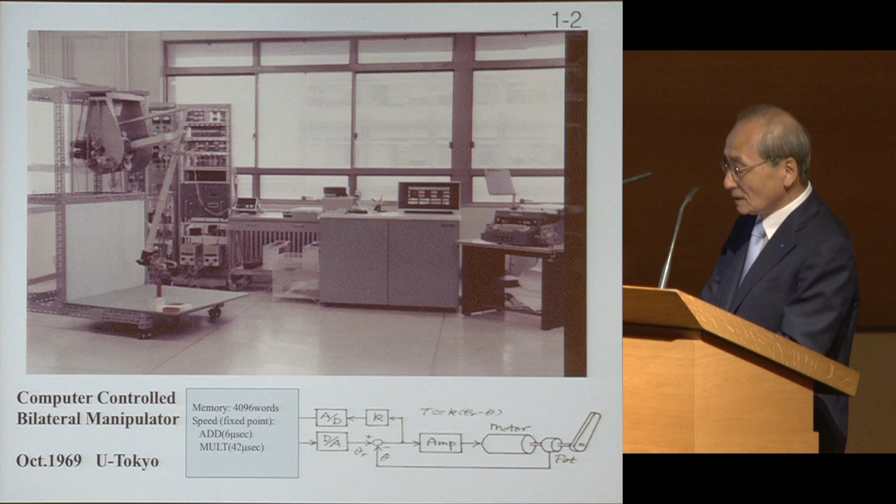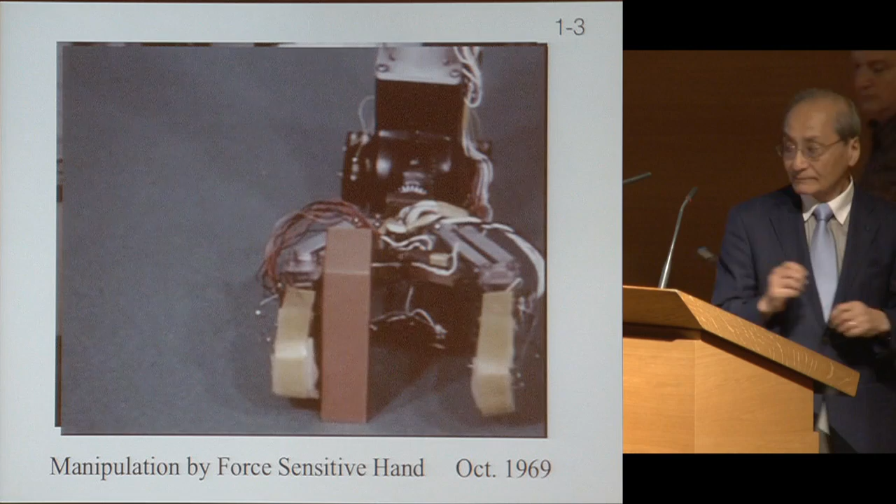So this is an experiment of the task which I did in 1969. The computer is interfaced with the manipulator, and this hand stops when it senses the touch. Okay, thank you. And using the tactile feedback, this robot can search and grasp correctly.

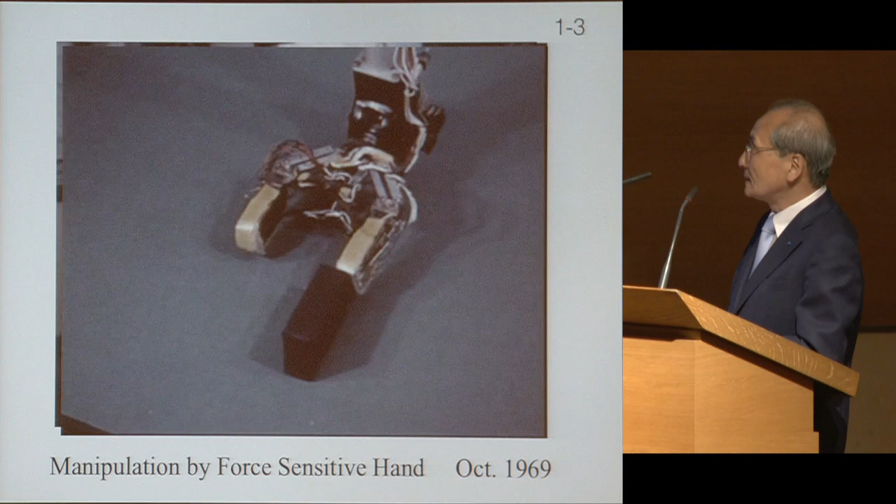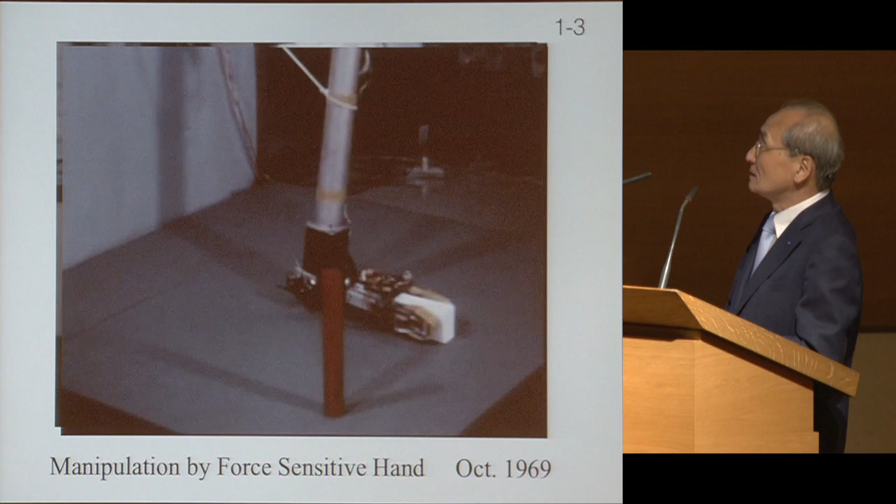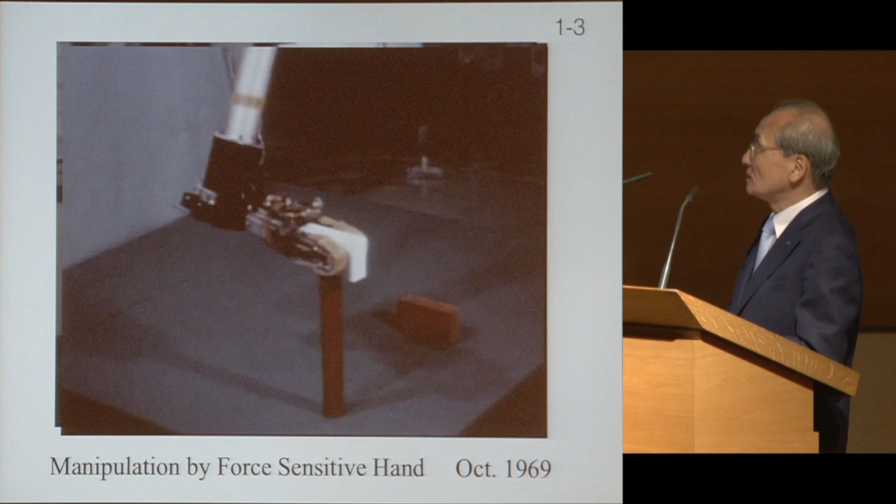And when I pull the block, it has no sense, but the robot feels the reaction force, and it releases after landing. This is also the same application to stacking the object. The robot mechanical hand must release the object after checking whether it completely touched down or not. In such a way, very good stacking can be completed.

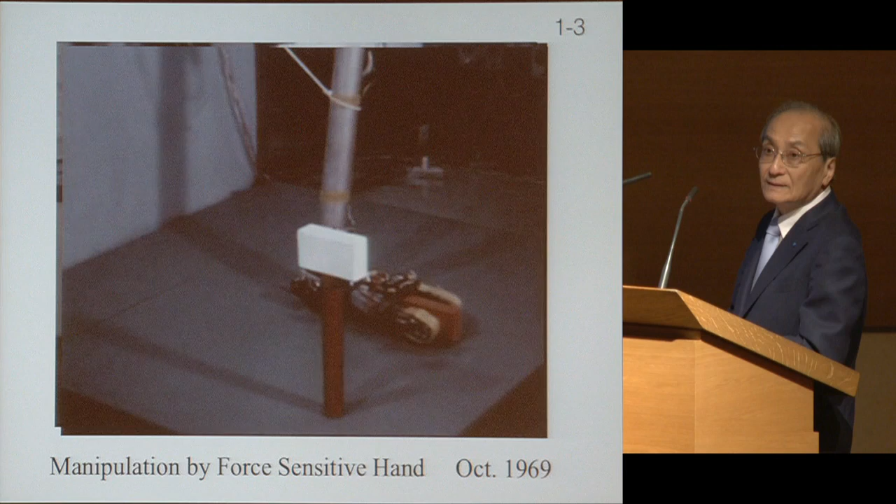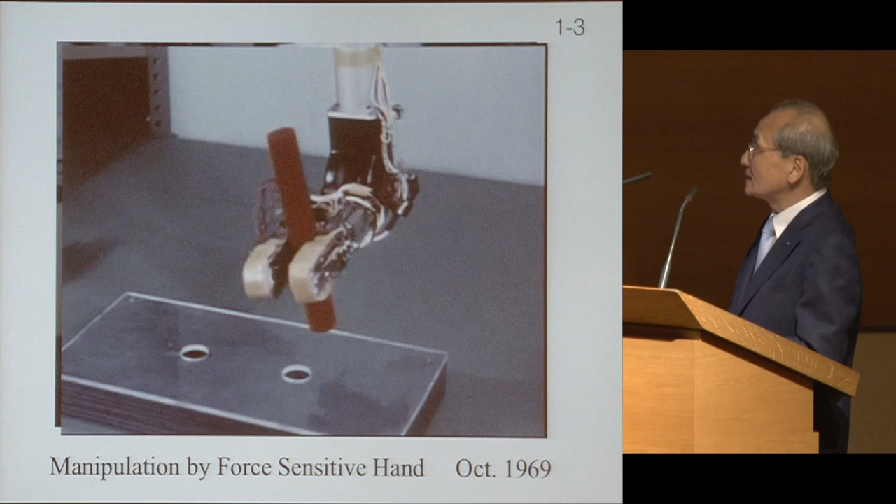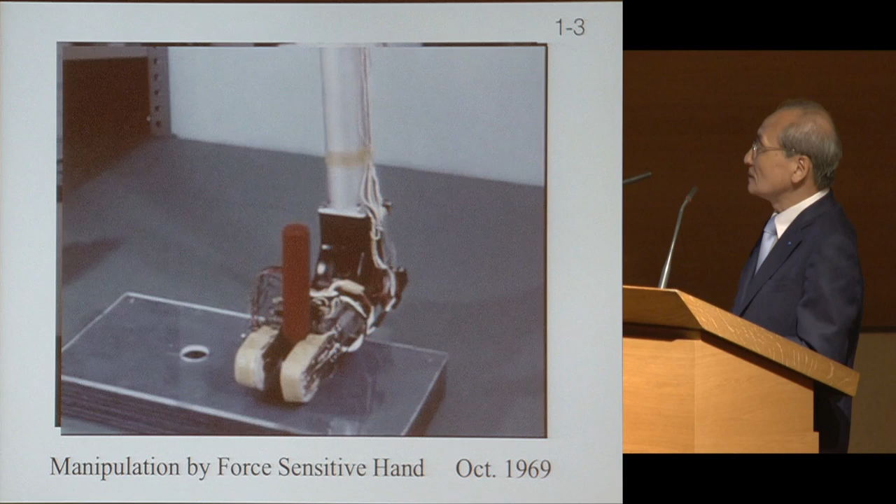At that time, the sensors were quite limited: about 18 tactile sensors and 6 degrees of freedom force sensors. So I think this is a prototype of the assembly tasks for robots. It searches and grasps the pin and pulls it out, makes sure it is completely pulled out, and then tries to search for another hole by sliding and feeling the reaction force, and it changes the shape and pushes in. So this is the very first experiment to make the assembly tasks.

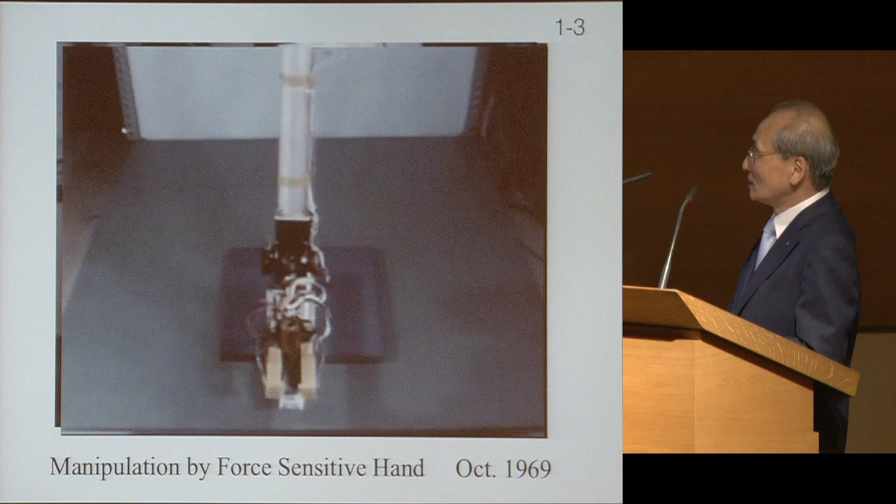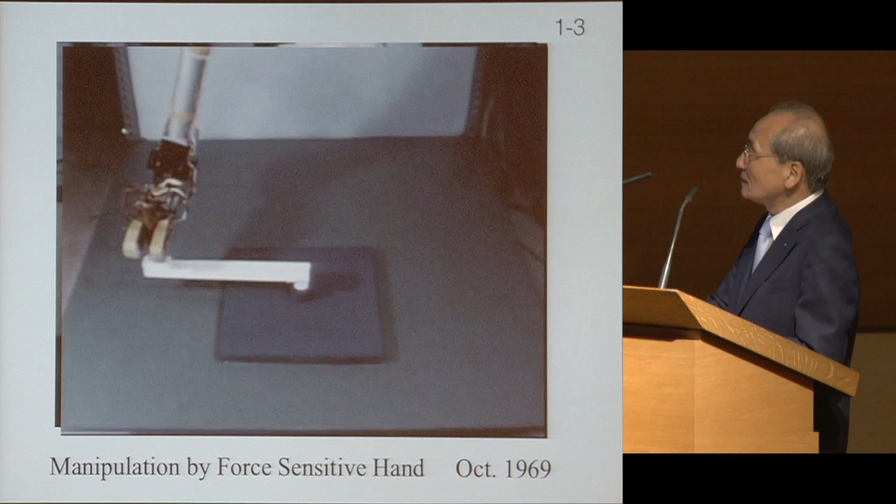This turning crank is a very difficult task because the locus trajectory of the crank is defined by the machine itself. The robot must follow along the constraint, so it needs force feedback. This is a key point of my PhD work.

Yesterday, Jean-Paul talked about 50 years of robotics, about industrial robots 50 years ago and today. But I think intelligent robotics started from the 1956 Dartmouth conference. At that conference, McCarthy, Minsky, and others defined artificial intelligence, so I think it is the birth of artificial intelligence. And in 1961, at MIT Lincoln Laboratory, Roberts did the TV camera interface to a computer, and he made the first computer vision.

In 1962, Ernst made a computer-controlled hand. This is the first computer-controlled mechanical hand. And also, as Jean-Paul said, Engelberger introduced Unimate in GM works, so maybe 50 years of robotics is counting from that. In the late 1960s and around 1970, that is the age of the hand-eye system. MIT AI Laboratory, Stanford, SRI International, Edinburgh University in the UK, and Electrotechnical Laboratory and Hitachi in Japan, 6 groups competed to develop hand-eye systems.

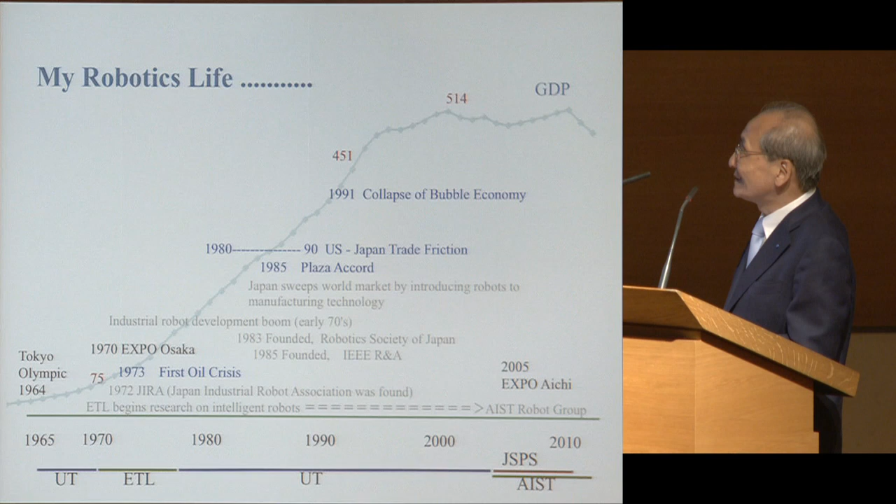And this is a curve of Japanese economic growth. When I graduated, the GNP was 75 or something like that, and right now about 500. So during these 20 or 30 years, it became about 6 times. After that, almost flat, and now decreasing. So society changed very much. The robotics research and actual application to industry is along this curve. The very rapid growth of the Japanese economy almost corresponds to the development of industrial robots and so on.

So I am going to part 2. Robotics is the study of the intelligent connection of perception to action. This definition was made by Sir Michael Brady when he started the first ISRR, in 1983, more than 25 years ago. I like this very much. Yesterday he said intelligent connection of sensing to action, but I think it is also action to perception and so on.

Along this idea, my study in the university environment was done with 4 pillars. One is manipulation, second is robot vision and hand-eye systems, third is vision-guided mobility, and fourth is system integration and intelligence. I think the most interesting thing in robotics for me is to make the science of integration, to combine perception, action, intelligence, user interface; everything must be integrated into a single system.

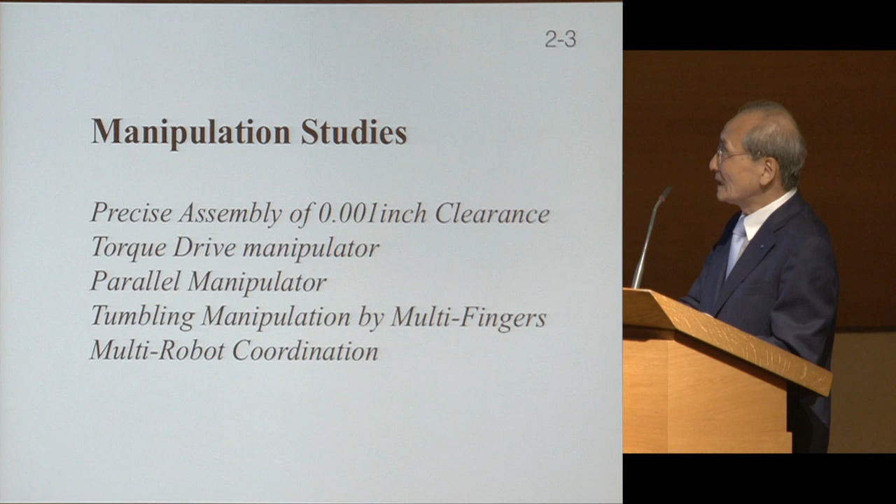For that purpose, I have tried many challenges with my students. In the university environment, not myself, but as Mike said yesterday, they are the creativity drivers, the creativity engine. And it is very, very happy for me to have very good students. In manipulation studies, I did many kinds of things, for instance, precise assembly with 1/1000 inch clearance, torque drive manipulators, parallel manipulators, and so on.

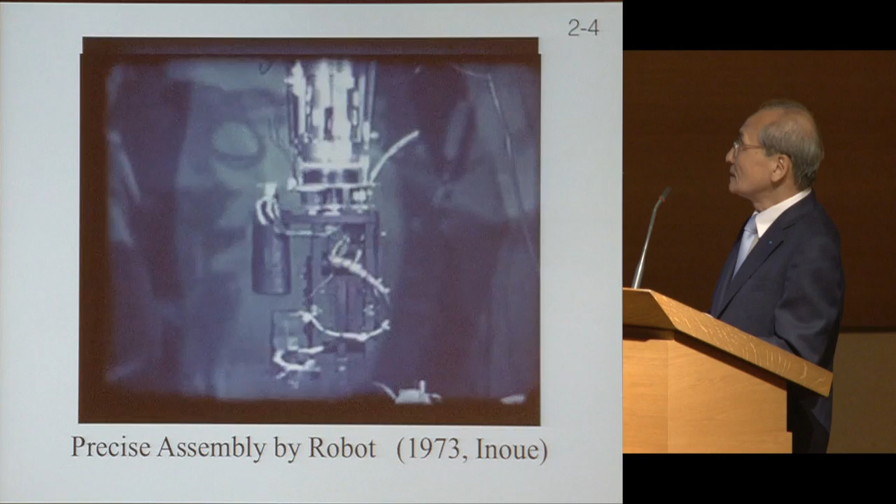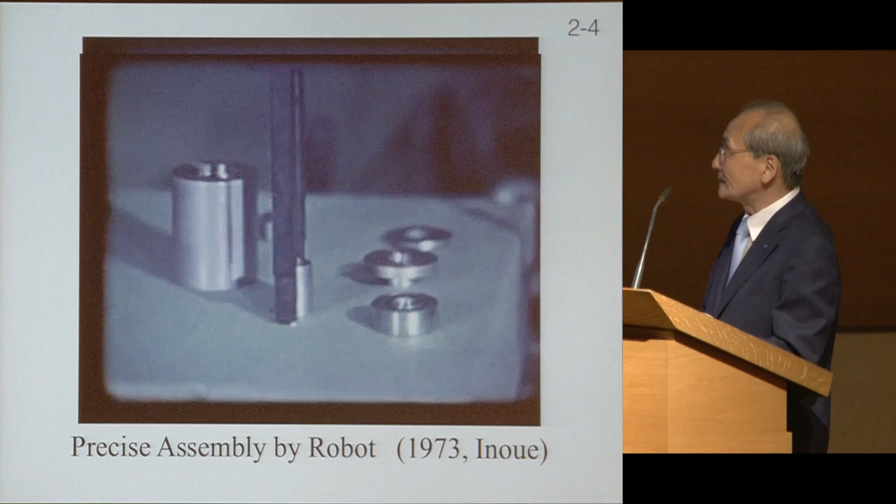I will show some examples from when I was staying at MIT in 1973. That is a very simple assembly task with very close clearance. This is the robot system interfaced to a PDP-6 computer that is connected to a PDP-10. That was a very good research environment for me. The method to do the assembly task is almost similar to my PhD work, but this is much more precise. And I enjoyed the stay at MIT very much.

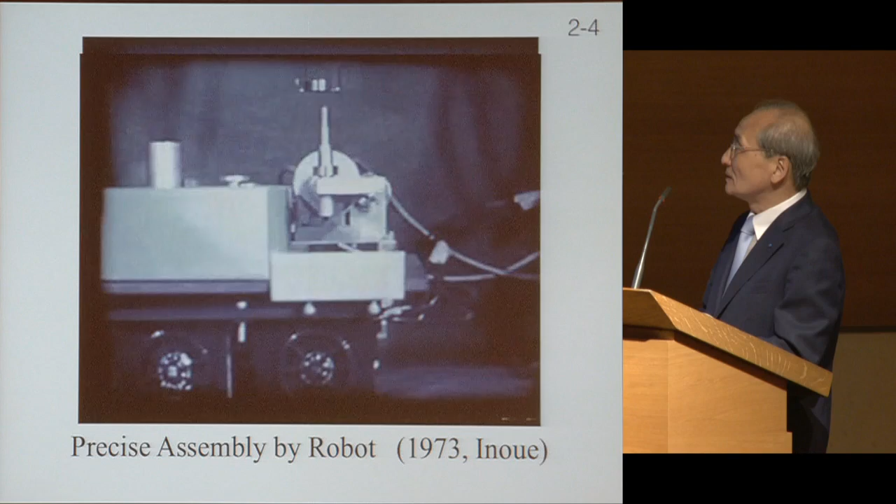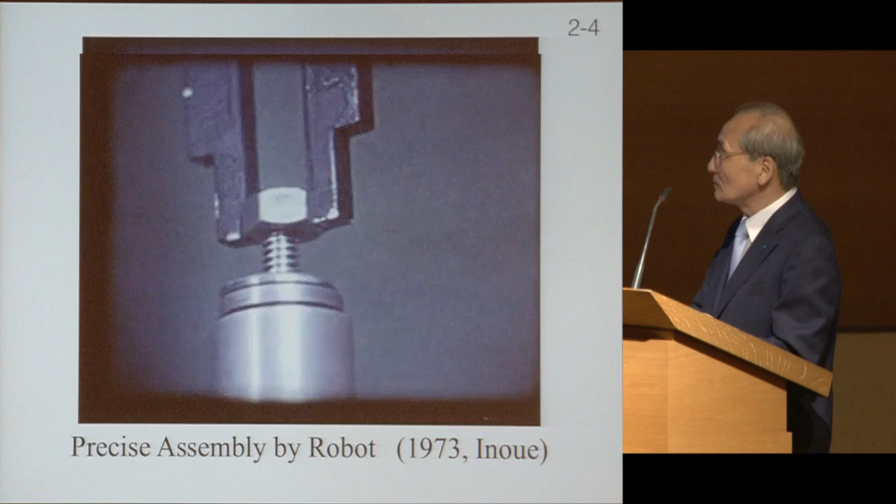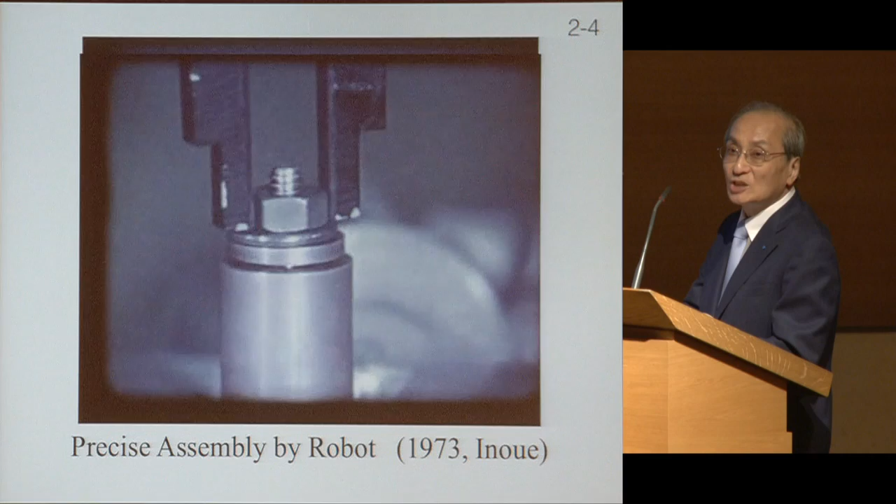When I returned to Japan and moved to the university, I decided every program must be written in my laboratory. In such a way, this is a very precise assembly task. One of the reasons is that Professor Minsky at that time made a mini robot proposal to DARPA that declared thousandth-of-an-inch assembly by robot, but nobody did it. So I tried. I had a good chance to do it.

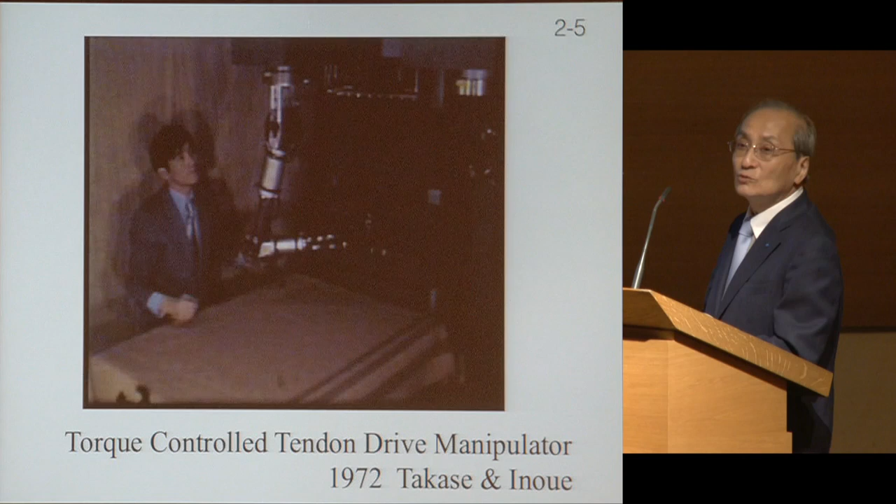Okay, so far, most of the compliance and force feedback is done by torque sensing and force sensing. But another new challenge is to create a completely new machine in which all of the joints are torque-controlled, not position-based. This is an example like that, and the smooth operation of the system.

So I have to hurry a little bit.

This is another interesting operation. Without grasping the object, we can change the posture of the object: tumbling, sliding, turning, in such a way. This is a very efficient motion, not only for manipulating very small objects but large objects like furniture. In that case, part of the gravity is supported by the ground, and just a small force is needed to change the posture.

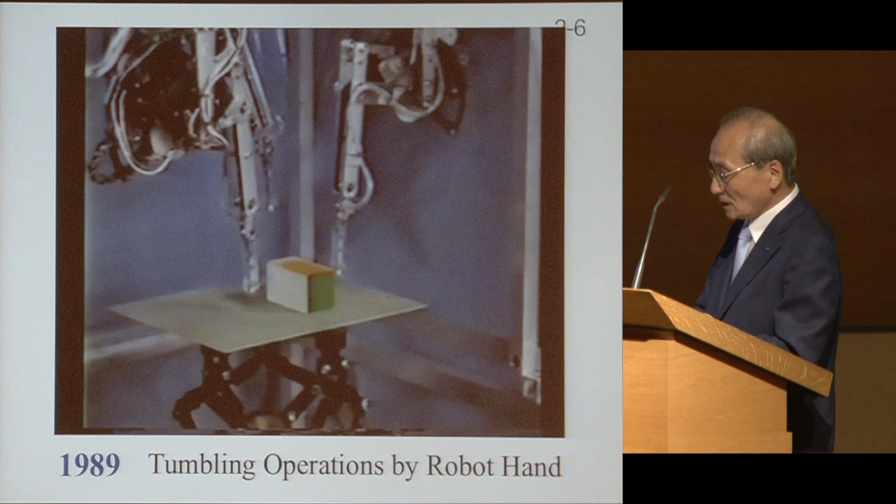So, the second pillar is robot vision and hand-eye systems. The emergence of the hand-eye system is around 1970. But when I moved from the Electrotechnical Laboratory to the university in 1978, I started to build a very small laboratory. All the walls must be painted, like Mike said, and this is a very simple hand-eye system: the vision system, a manipulator, and a computer system, and all my students were engaged in their study using this system. Somebody concentrated his effort on the vision system, others on manipulation, and others on intelligence, planning and so on.

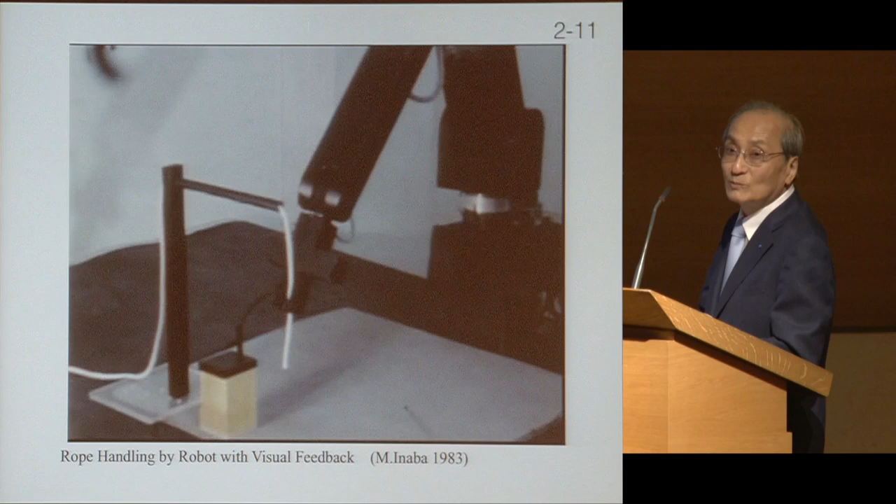So using those activities, we prepared a system, Cosmos, a platform to accumulate cognitive sensor-motor operation studies. Every year, every month, every week, the activities of my laboratory were concentrated and integrated into this system. And the first experiment is tying a knot. Professor Inaba, at that time a student of mine, tried to make the stereo vision system, to recognize the position of the rope, find the hole, and turn a crank. At that time we did not have much money, so a mirror assembly made the stereo vision system.

Right now, everybody carries digital cameras, and the performance is getting very good, and taking the picture and processing, retrieving, and changing the image is very easily done. But 30 years ago, it was very difficult to get computer vision systems. Before doing the hand-eye system, at first we had to build our own vision systems. So I also tried to develop some vision systems, the stereo vision system, shape recognition, depth and so on. In such a way, every vision system must be connected to the manipulation studies. I think computer vision pursues the precise recognition and representation of the object. But for robot vision, it is very important to make the feedback in real time. Therefore, some local high-speed vision is needed, also in 3D. So we developed many kinds of vision systems.

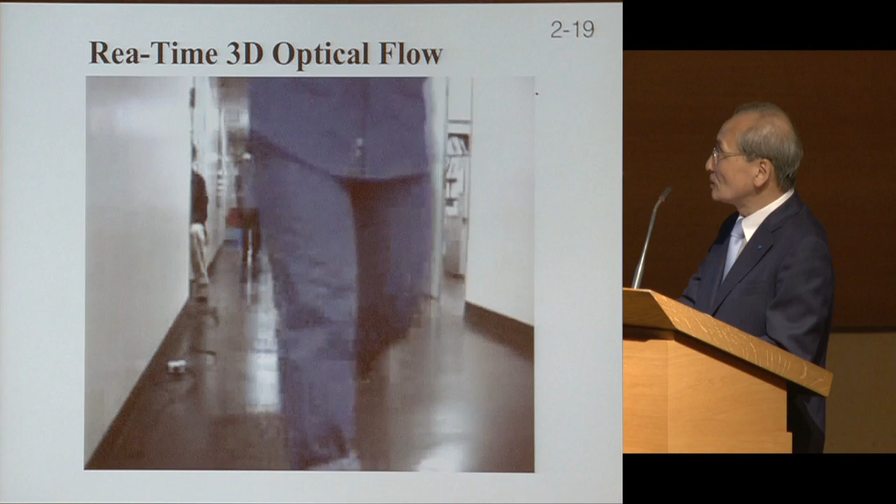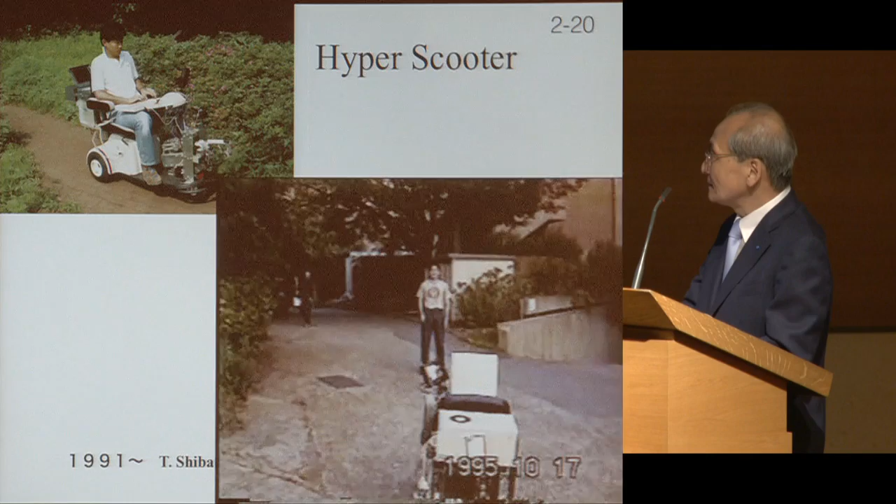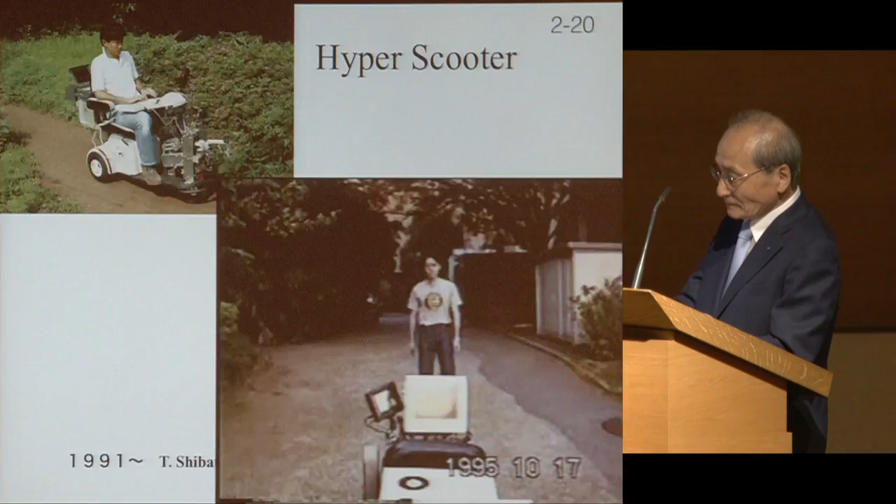So the third is the vision-guided study. We have developed many vision-guided robot systems. This is a stereo tracking vision system put on a mobile robot, detecting moving people and recognizing objects. And this is also the scooter system, in which computers, the steering system and the stereo vision system are put on a senior citizen's wheelchair. This guy built this system and did the experiment here. That was about 15 years ago, and a car was coming, so he was forced to stop. Maybe the driver was surprised. And this is also another kind of mobility.

The technique which is used for controlling locomotion, that is also the vision-guided motions. I have to skip. The fourth pillar is the system integration and intelligence. So the mobile robot with vision, manipulation, and AI, and teach a robot how to handle objects by showing task demonstration, and also remote brain approach for software R&D.

So I will talk a little bit. This is my first build of the totally integrated robot system, mobility and manipulators and the TV cameras here. This is a fiber scope here, and this is the lens. Look down here, and this is a tactile sensor over there, and the manipulators, the vision systems, and mobility, tactile sensors, and this is connected to the large computers for making the intelligent system. So using this, we have tried many demonstrations.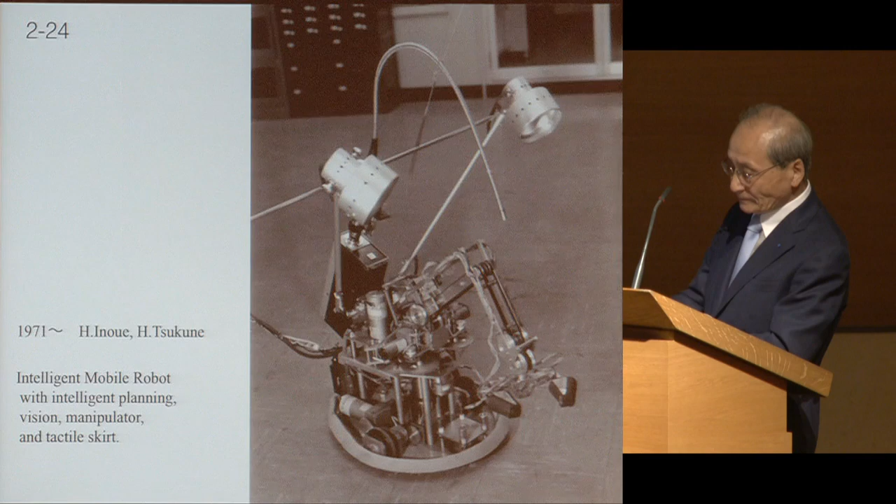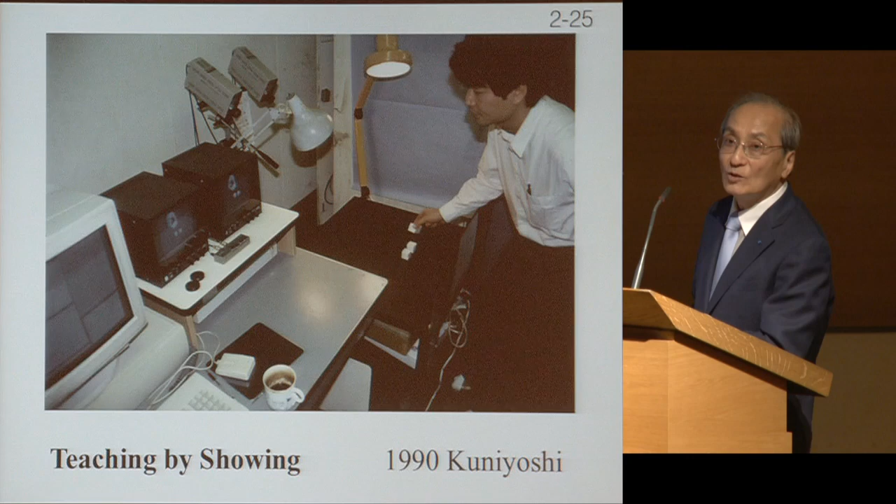This is Professor Kuniyoshi now. He is showing his assembly task in front of the vision system. And this vision system recognizes what kind of assembly task he is doing, and recognizes, making a plan and turning it into the real program. That means let's show some operation in front of the robot vision, then teach what should be done.

This is a very interesting approach, which is done by Professor Inaba. He is a successor of my laboratory. When he was the young professor, he proposed this remote brain approach. That is about 20 years ago. The robot consists of brain and body. Body is a machine to be controlled. Brain is a computer. Usual design. In usual design, computers are put inside the machine, but by the limitation of the size and the weight and so on, the computer performance is quite limited.

Dr. Inaba does not like this kind of limitations. So he considered to link this robot with the computer by wireless. This is just only the wireless servo systems, and the computers and wireless servo system are linked by wireless, and the vision system is also linked by wireless. So using this, the brain is placed in a remote place. So he said, remote brain approach for intelligent robot.

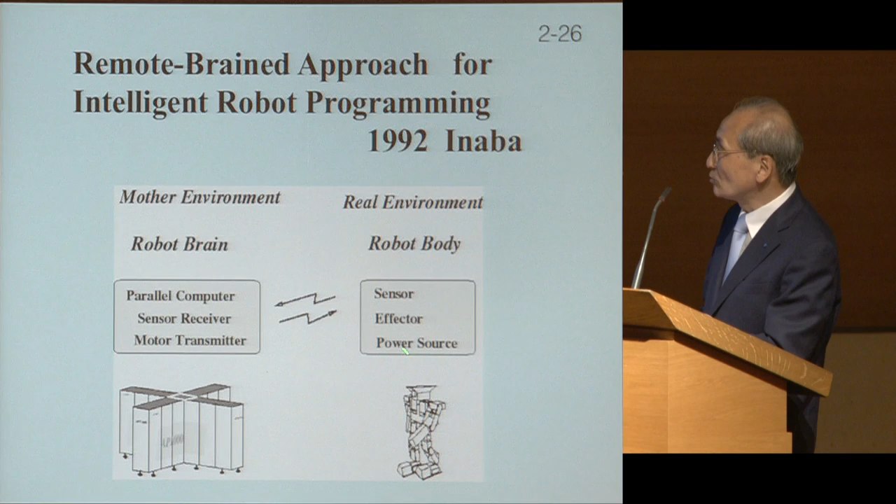This is quite a good approach for the study of intelligent robotics, because the size of the program is not limited to the computers on board. So supercomputers are used to make the recognition, the intelligence, and the database, and then the result is transferred to this. Using this, many kinds of robot were done.

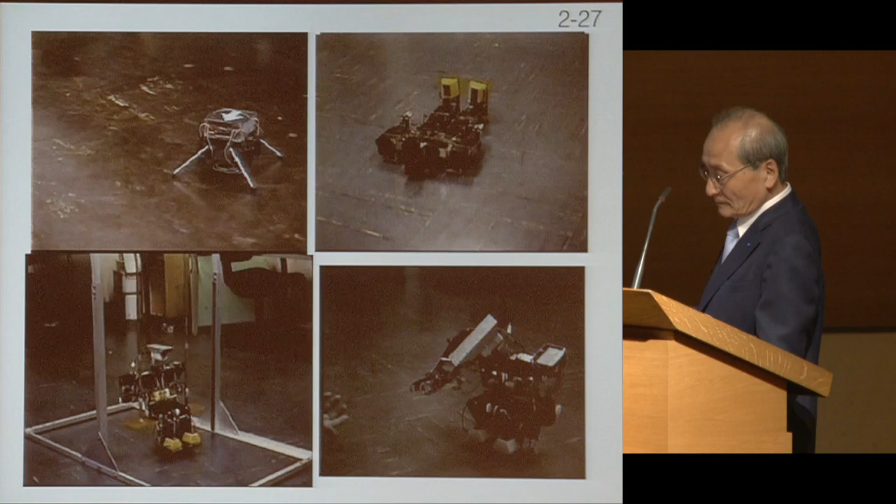This is a 4 degrees of freedom very small robot system. And this is for the servo system, wireless servo system. There is no computer here, but it is maybe the first, just only one robot that can turn and has no problem to turn over. It can change and turn. Another approach. Oh, sorry.

This is this robot, the human-shaped robot, very small one. It is not afraid to fall down. Even if it falls down, it can stand up. Therefore, it is very good to do experiments like this. When I show this movie to some small children, they ask, does this robot feel cold? But this is just a noise.

And also this is the vision-guided motion control, the swinging operation, to get the timing to accelerate the motion. The vision system is here, and looks over something. And according to the motion of some target, this robot can identify at what time they can move it.

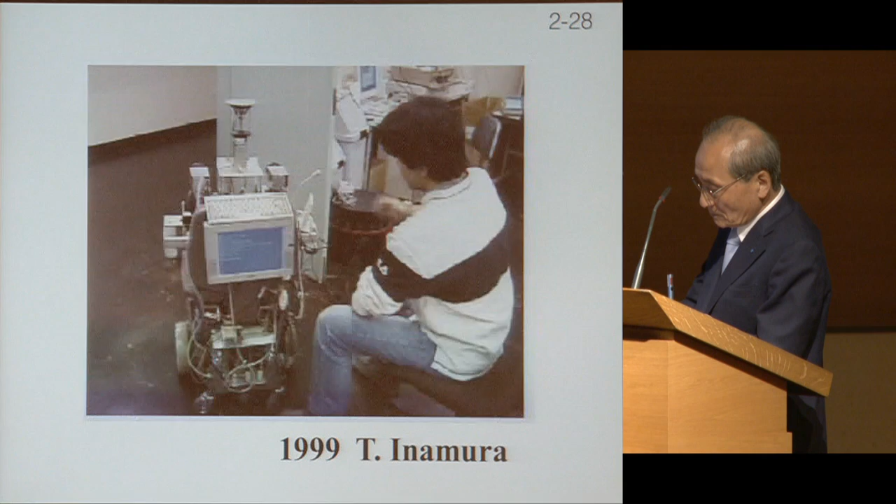Okay, I have to move to part 3. The part 3 is about humanoid. The last 5 years of my university work is devoted to developing humanoids. The reason, reason one, humanoid is an ultimate target to integrate all aspects of robotic functions: perception, manipulation, mobility, intelligence of all kinds, communication with humans, and energy and structure. All of them must be embedded within the limited size, weight, and shape.

To create anything which we need is the policy of JSK. JSK is my laboratory. We have developed and accumulated all the necessary technology by ourselves. All the technology was transparent. Therefore, we can change everything to integrate as we want. And the last 5 years, I think it was a time to integrate them to build a humanoid. Because without this opportunity, I have no chance to build a humanoid in my research life.

Therefore, the last 5 years were devoted to humanoid, and this is also a little bit older, one of my sons. And this is a dynamic humanoid. Year by year, we developed many kinds of things, H6 and H7 and so on. All the machines are designed by our students, and every program, vision, control, everything is done by them. One of the motivations why I started the humanoid is that at almost that time, Honda announced its humanoid systems. When my students saw Honda's P2, the shocking humanoid studies, my students wanted to build a humanoid by themselves.

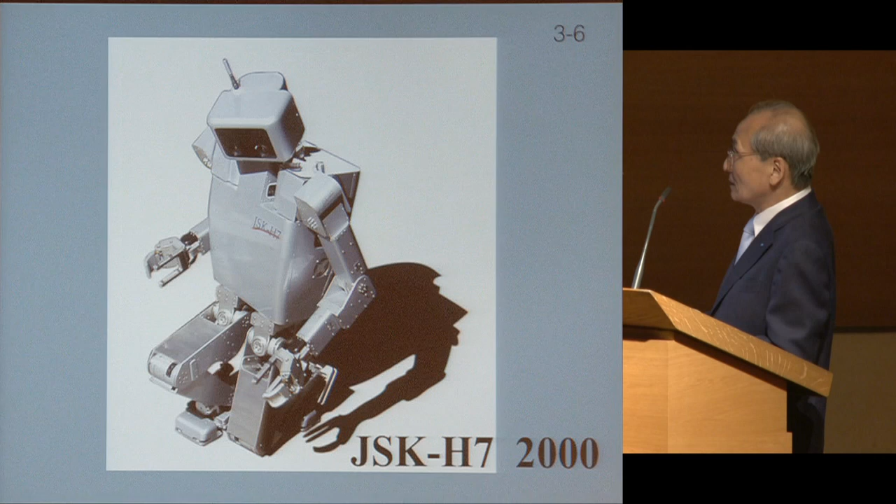So they asked me to have a plan to build a humanoid. I decided to do it because most of the components, the control system, vision system, intelligence, communication, everything was done by the remote brain approach beforehand. So the only difference is not the remote brain system, but real embedded computer systems. So it is not so difficult to develop. Honestly, it took about 1 year to complete it.

This is 2001. Marc Raibert visited my laboratory. He had no appointment. He called me one day: I am now in Tokyo, I heard you built a humanoid robot, so can you show me? Then he came, and he tried the joystick control. I think he's a very good driver. By moving the joystick, he can move the humanoid, very dynamic work like this.

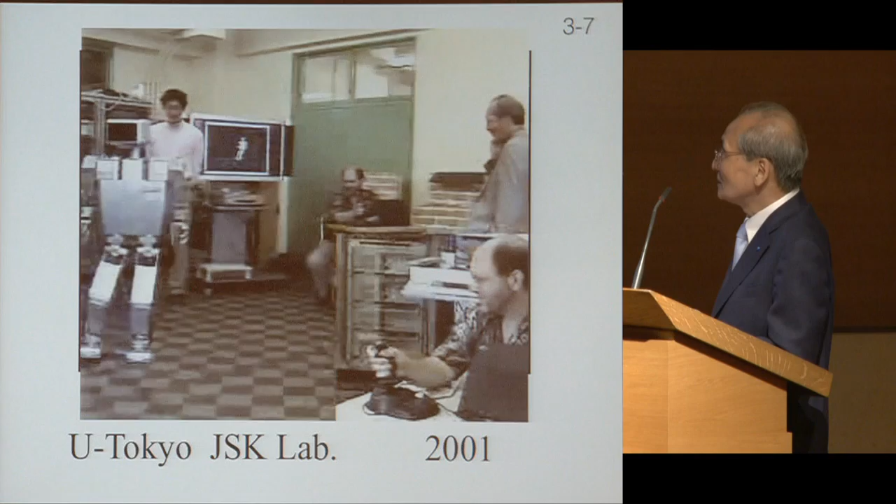Oh, changing a little bit. So this is the guy who developed it, Kagami-kun and Nishiwaki-kun. They did not control the robot like this because they were sometimes afraid it would fall down, but Mark didn't.

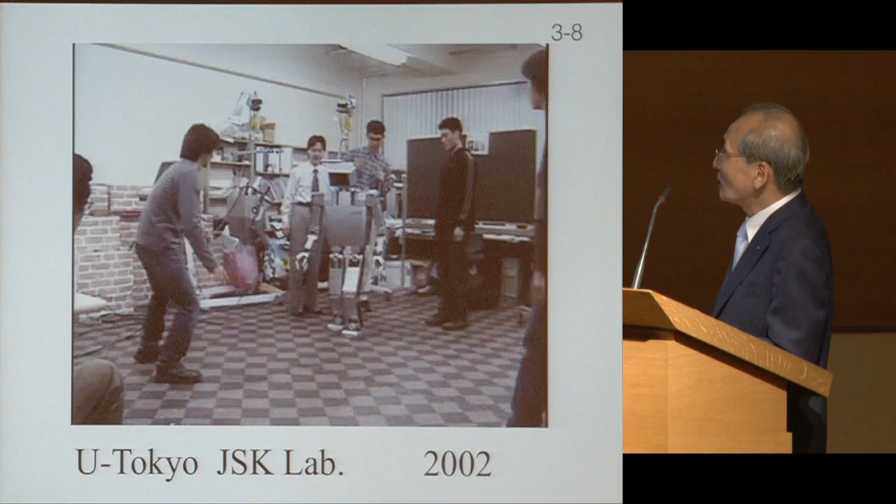And 2002, it was just after 9/11, and at that time the Davos meeting was not in Davos, but in New York. Rodney suggested I join this Davos meeting, and at that time I brought this movie. This is the robot system. Find the pink ball and try to catch and take it. But my student is not so kind. So he comes and moves it another way. In such a way, using visual and motion interactions, human and robot can interact inside my laboratory.

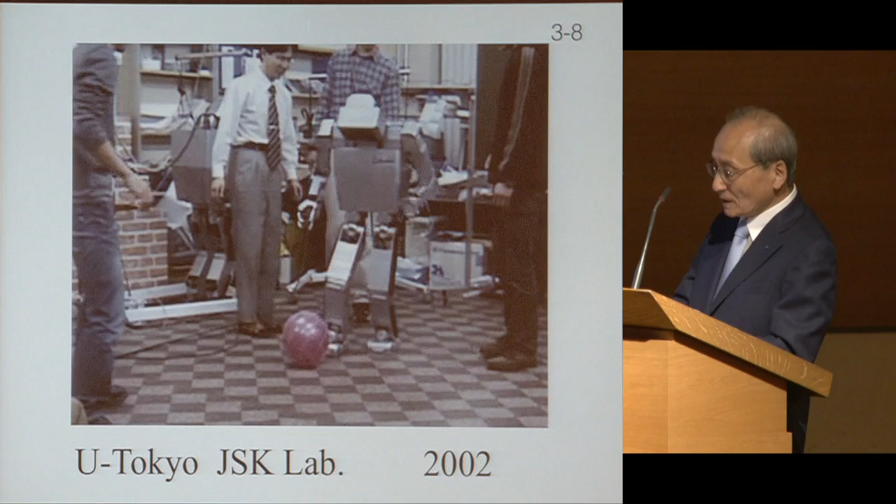my students know my first work was turning a crank in 1969. In Japanese university tradition, when retiring, you have a final lecture. I did the final lecture at the university in March 2004. At that time, my students had a secret presentation. This is a movie of that. I didn't know about this kind of secret project.

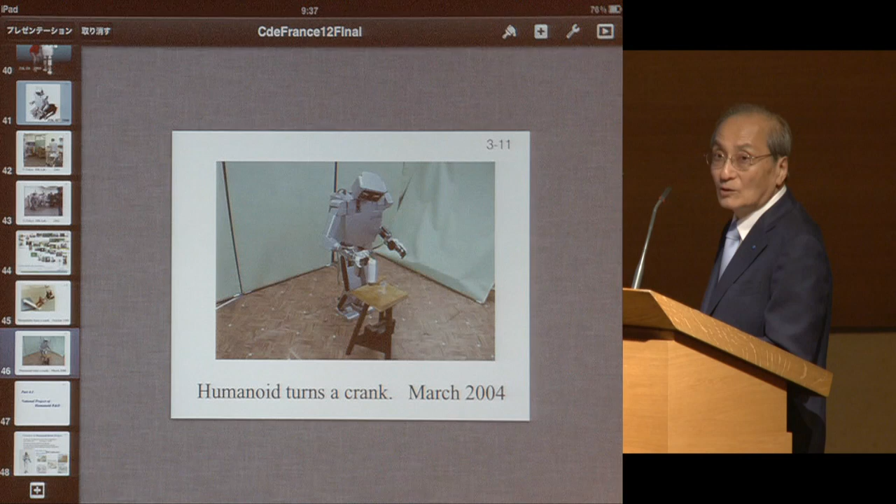My students knew my first work was turning a crank 42 years ago. But after completing this humanoid robot, they let the humanoid turn the crank much better than my PhD work. He's turning like this. So I felt very, very happy, because this operation of the humanoid turning the crank was a very good present for my retirement lecture.

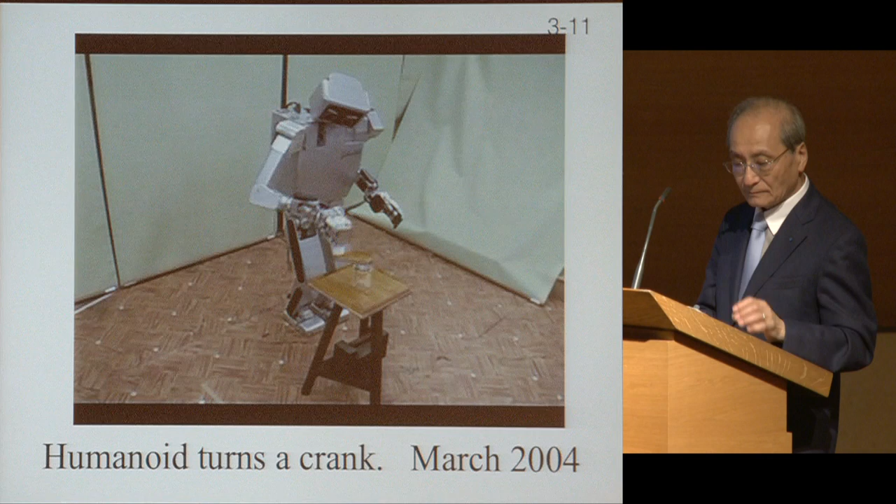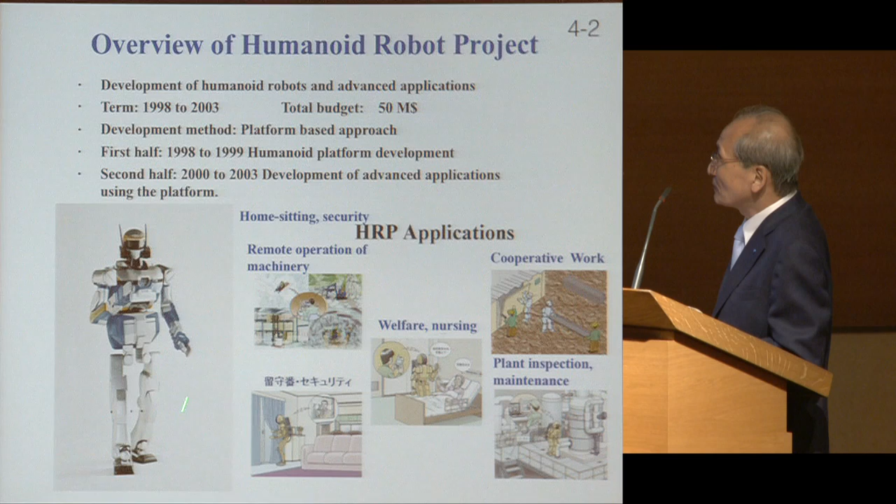So, in part 4, so far I talked about my own research and the university environment, and furthermore, I was also appointed project leader of a national project. One is a national project of humanoid R&D, and this is the machine made by Kawada Industries for the METI-sponsored humanoid robot project. It was a 5-year project from 1998, total budget about $50 million, and the development method was to develop a platform. Using this platform, many kinds of applications can be done. So I think this is a platform which is on the market now.

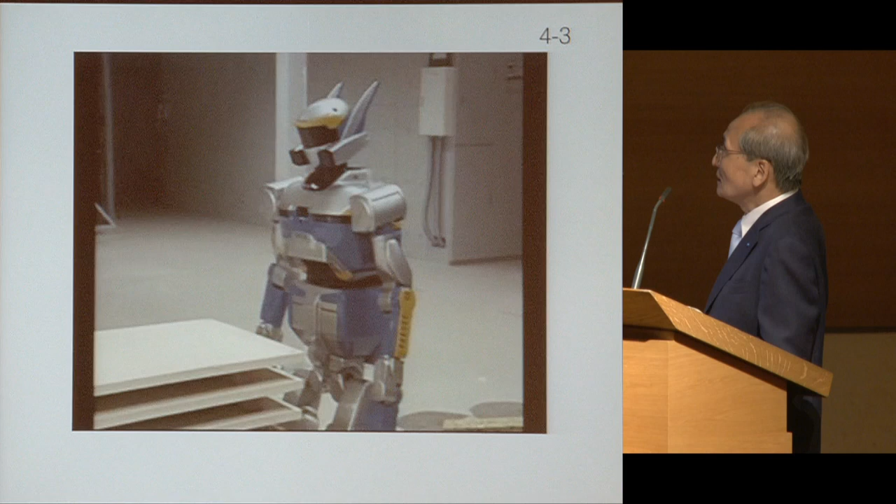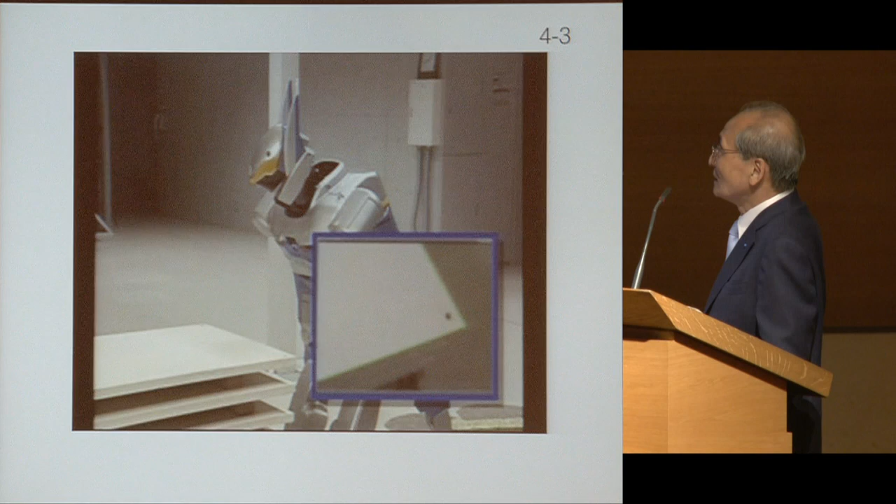And some of the experiments are here. So the vision system recognizes this plate, in collaboration with humans. He's now looking down and recognizing where the panel is, and carries the panels together with the human. So compliant motion is also needed. The motion is guided by humans by force feedback.

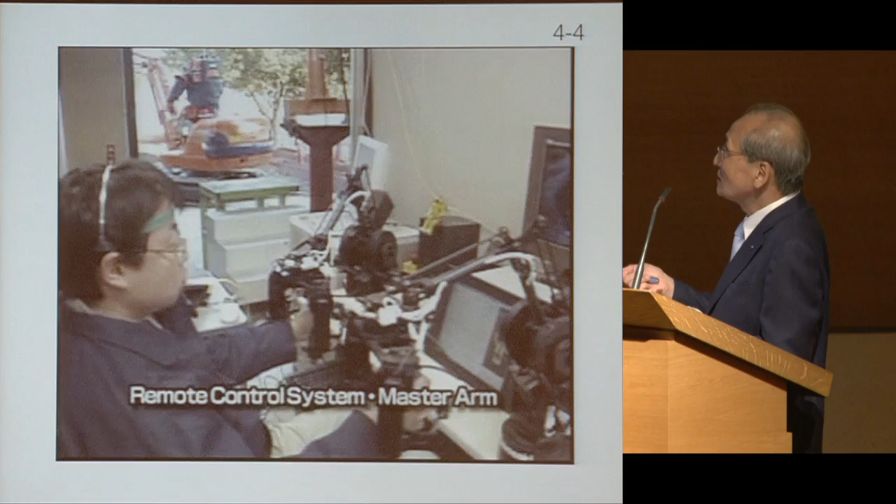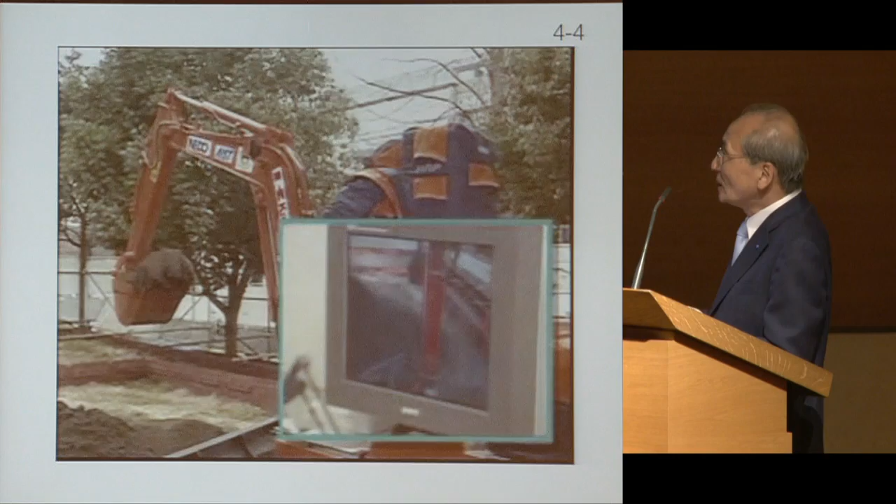And another approach is an interesting thing. This is a robot, not a human. The humanoid is riding on the machine, and it is controlled. This guy is controlling the humanoid, and the humanoid controls the machine. That is one concept: any kind of machine can be controlled by a humanoid. That is one example. The performance is not good enough, but we have tried this kind of thing.

And another big project on the national level is the Expo in 2005. 7 years ago, we had the Expo in Nagoya. At that time, METI, the Ministry of Economy, Trade and Industry, decided to hold a robot exposition. And this is the prototype. We called for robot development for the Expo for 2 weeks. From 300 applications, we chose 65 demonstrations from universities and companies. And the result was shown in the exposition.

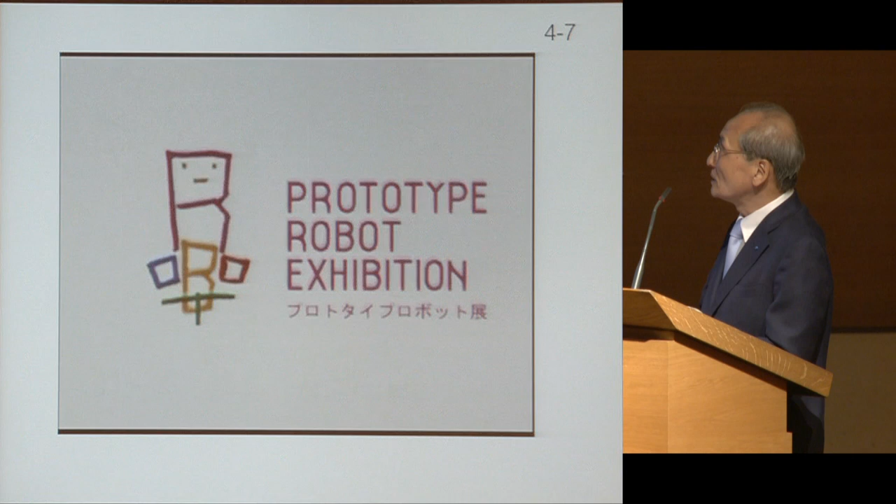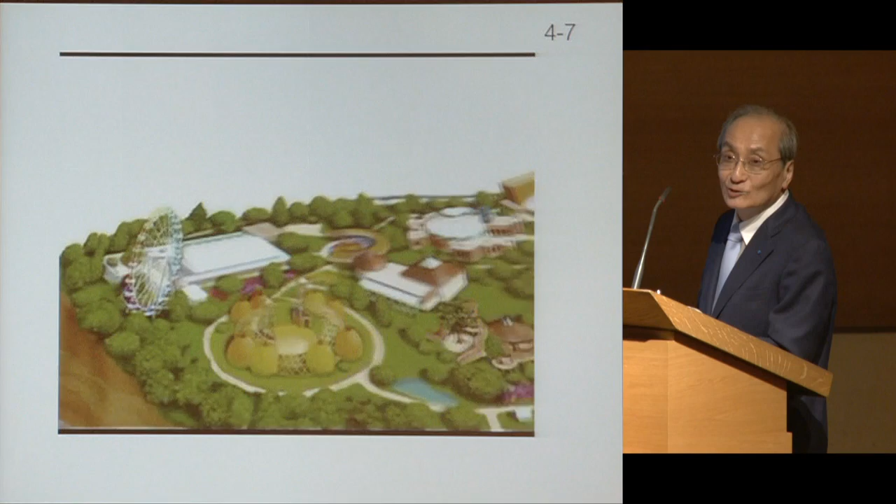I think some of you have experience of this robot exposition. I was asked to be the project leader of this, and I enjoyed it very much, but the team suffered to create it for this demonstration. There are many kinds of robots which we support for the future town, many kinds of robots will be introduced into society, in park areas, hospitals, homes and so on. So many kinds of robots were prepared and demonstrated.

I think I will skip it. Three years ago, the Japanese government high-level committee of space development launched a special working committee for feasibility study of moon exploration by robot. I was involved as a committee member, and I proposed sending humanoids to the moon for exploration.

From the standpoint of robotics, I attempted to make a possible plan to send a humanoid to the moon. The major purpose of my proposal is to create novel machines, novel means for space exploration, and I expected the new technology could be brought down to Earth for our future life.

When I was investigating the possibility of a humanoid on the moon, the most severe condition is the environment. The physical condition on the moon is extremely severe, not only for humans but also for machine design. The surface temperature is 120 degrees Celsius in daytime and minus 170 degrees at night. The atmosphere is all vacuum, no air. As you know, a no-air environment causes severe problems for heat transfer and tribology, so conquering this kind of thing is much more difficult than creating human intelligence and control.

By the way, there is a myth that components of space machines need to be developed as extremely special, but I didn't agree. I propose to solve this problem by having the robot wear a space suit. The space suit divides the world in two: outside the space suit is the moon, inside the space suit is the environment of Earth.

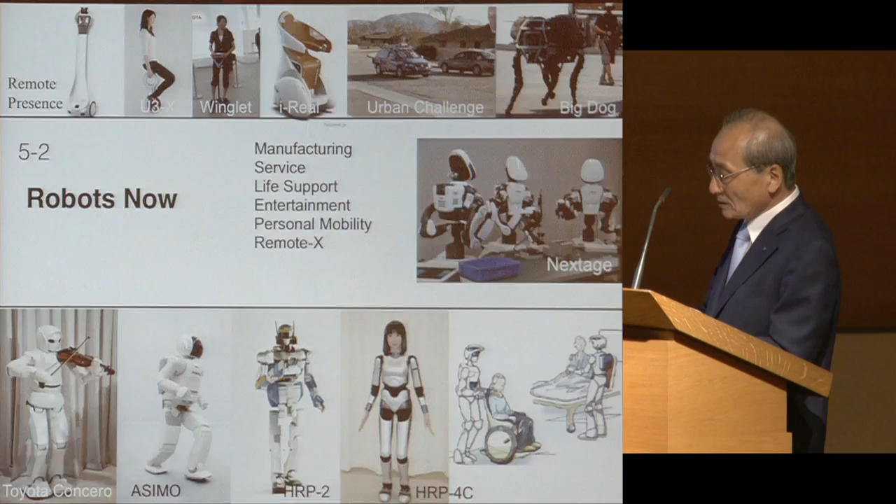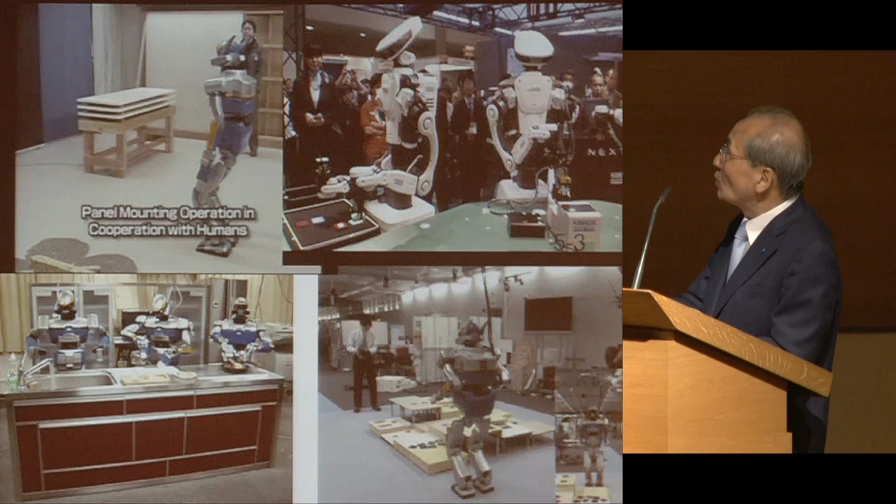And using the humanoid, we have this kind of example - this is Professor Inoue's laboratory. The three humanoids are cooking and washing and so on. This is just taking this kind of operation. They have complex dexterous actions being performed.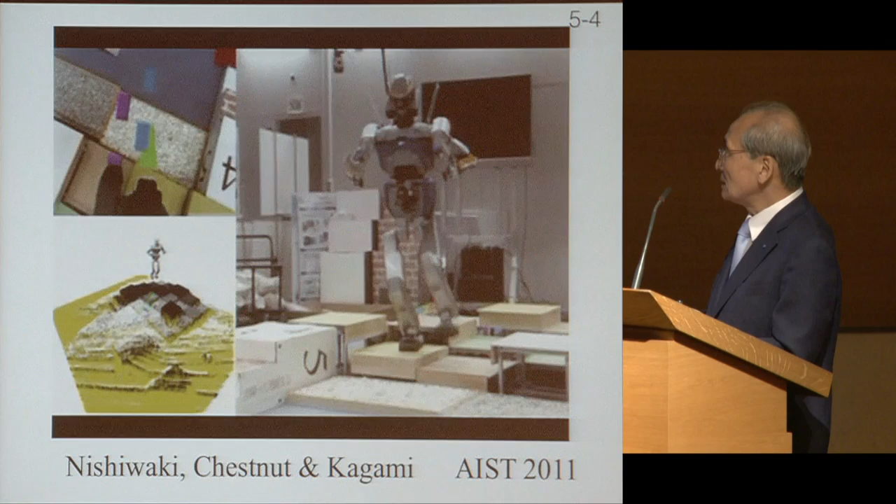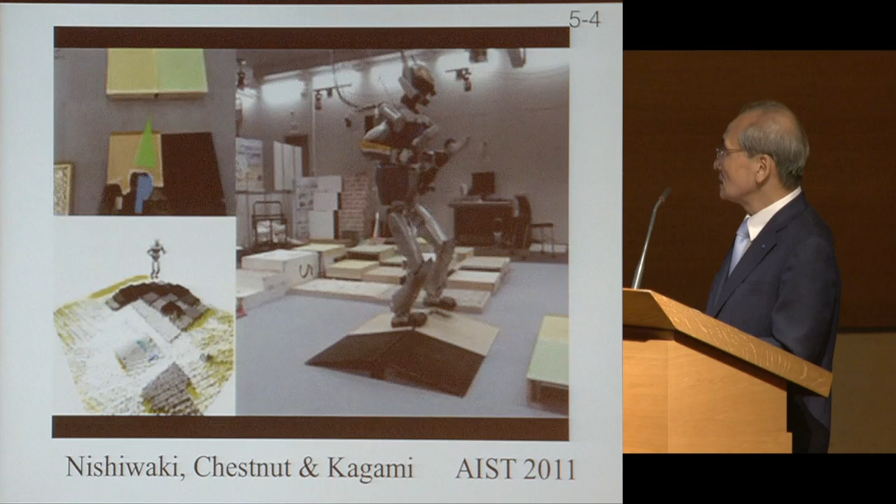And right now, most of the experiments are done like this. The humanoid can recognize very complex terrain and make a plan to move in real time. So right now, the humanoid can handle not only flat spaces but also pebbles, and different positions.

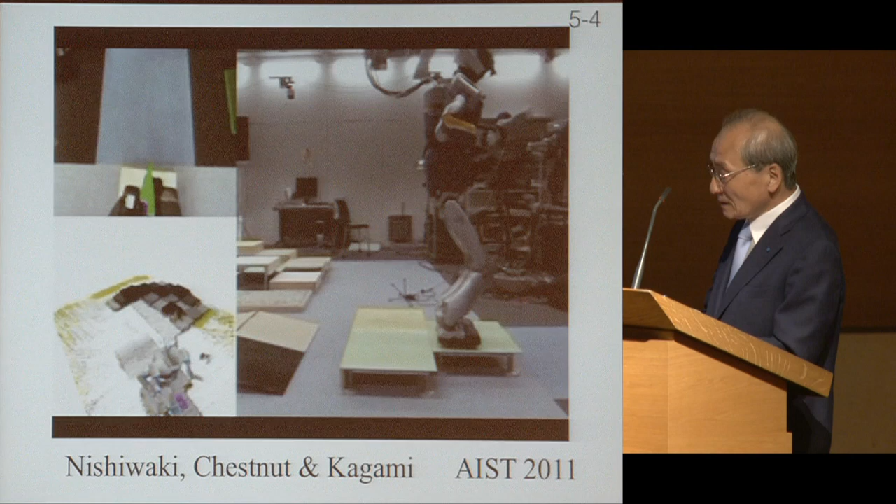Also, this robot can walk even on sand, because it is necessary for sending humans to the moon. The moon is covered by regolith, very fine sand.

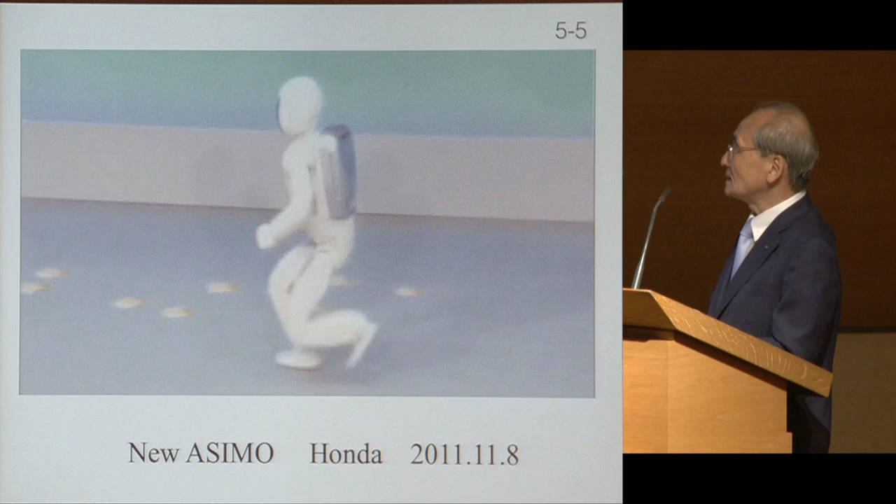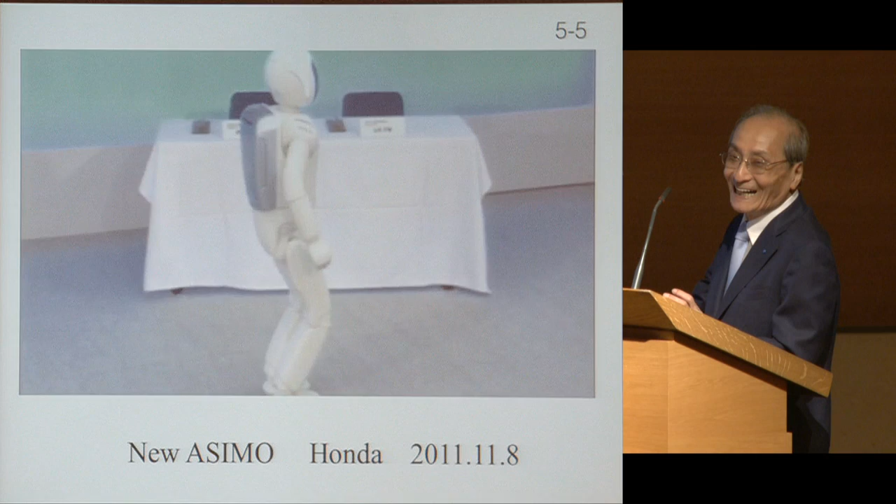Another current performance of Japanese robotics is the new ASIMO, which was developed last November. This is right now the most advanced performance of the Honda ASIMO - jumping and running and so on. The running speed is 9 kilometers per hour. I cannot run for so long at that pace, but 9 kilometers per hour is very impressive, and it can also kick a ball very powerfully.

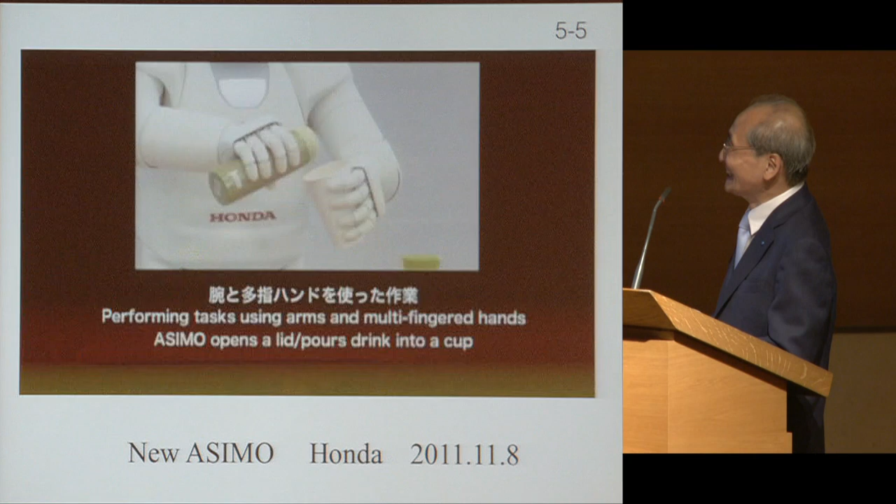So maybe for some World Cup or something. And this is not only kicking, running, and jumping, but it also has a very dexterous hand to turn things on and take them off.

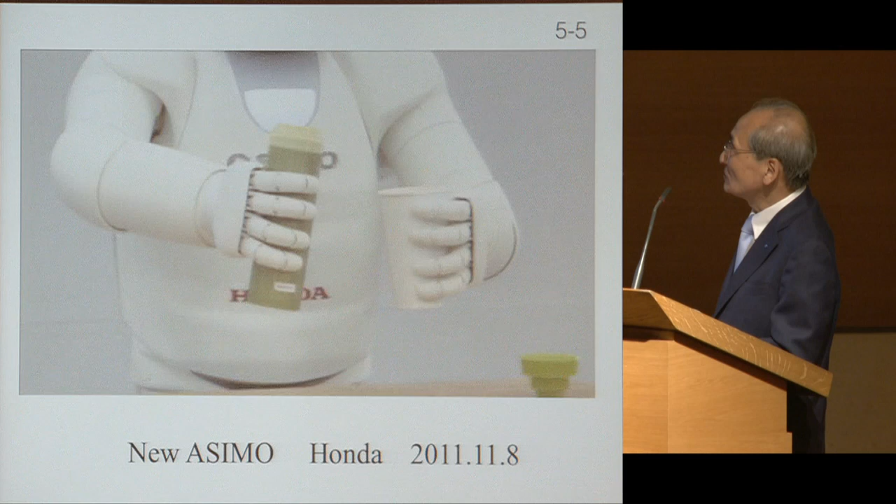Not dexterous enough, but it does. So this is sensed by the vision system, to detect and to make the...

I recognize the challenge to humanoid as a very good technology-driven project. New parts, new theories, and new system architecture can be tested in those challenges.

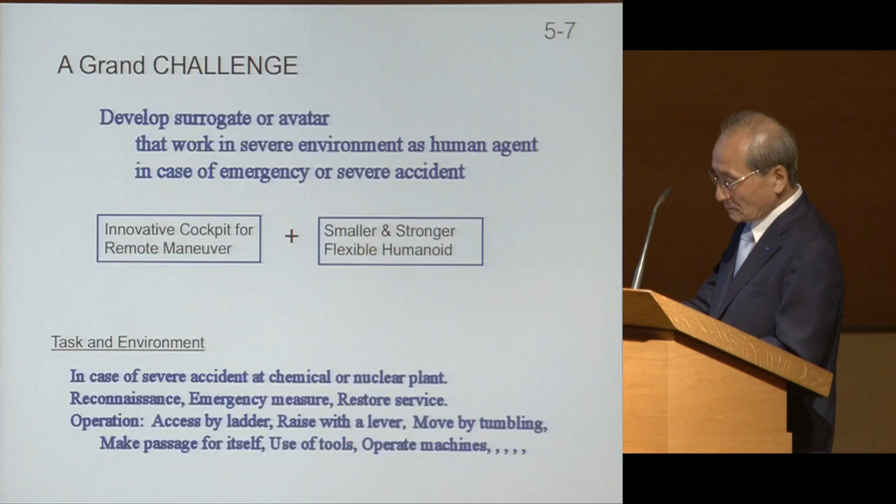I think smaller and stronger body is needed because it must go into narrow spaces. So I think 80% in size, but power needed more than 150% of an adult. Complex and flexible whole body motion, and dexterous and powerful manipulation is needed.

Tasks to be challenged: traverse a compound destroyed route, create own walkway, bring and climb a ladder, move heavy objects by lever, tumble, slide, and roll big objects, use of tools, replace machine components, and drive utility machines or construction machinery.

In such a way, I want to make a new scheme for humanoid. I think the surrogate or avatar of humanoid is something like this: tele-X innovation.

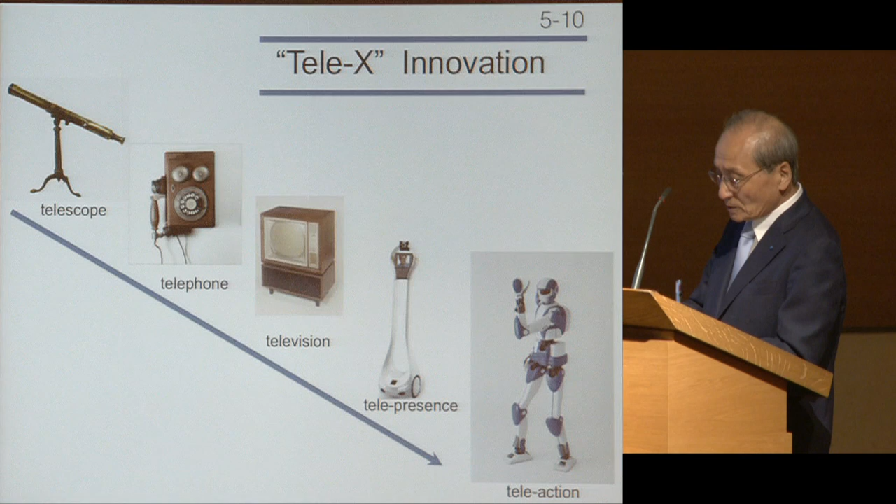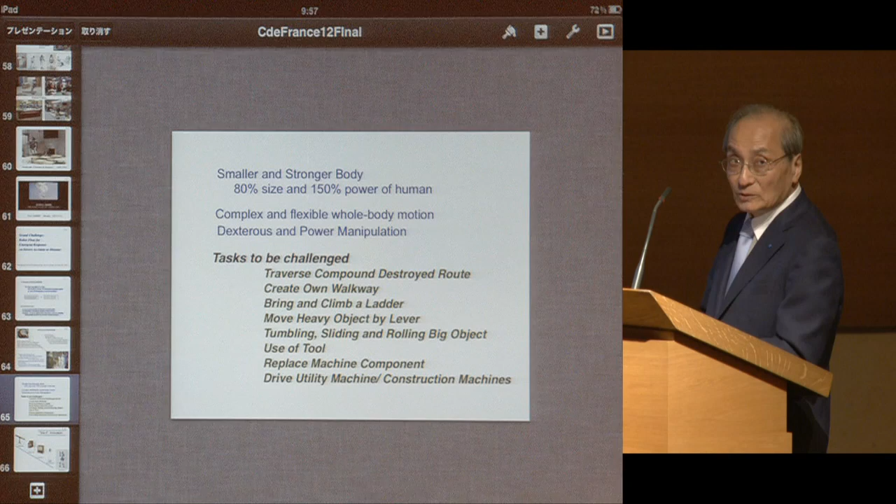So I think the proposal which I made, this would be done: tele-X. And the topics are realizing this humanoid, and also the novel cockpit.

Many of you know, very recently DARPA announced a grand challenge, the robotics challenge. The scenario of the DARPA robotics challenge, I think, echoes my proposals at last November's DLR.

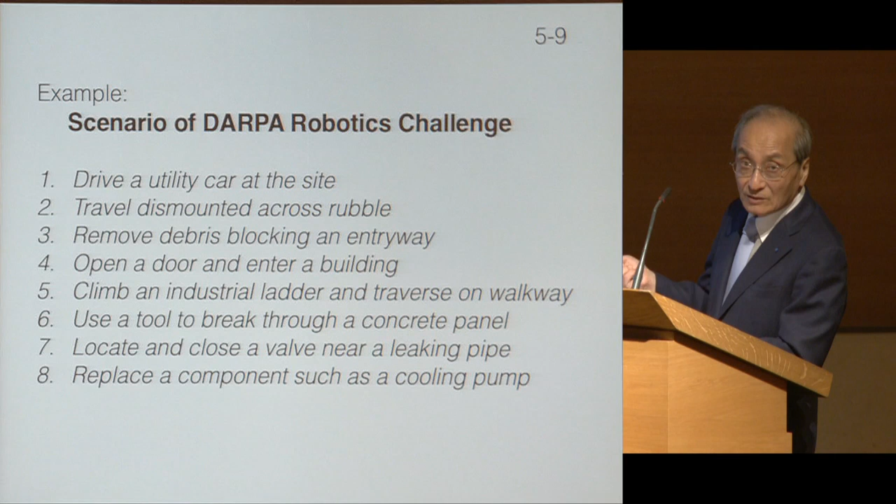The scenario is like driving a utility car, like this. So all of this scenario must be done by a single machine, which consequences the humanoid systems.

So I think, by proposing this grand challenge, if I was younger than I am now, I would definitely challenge myself to do this kind of humanoid work.

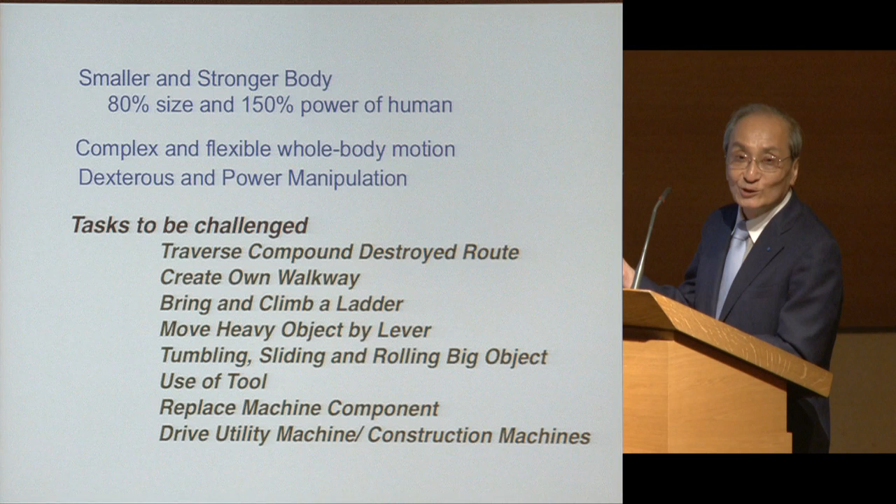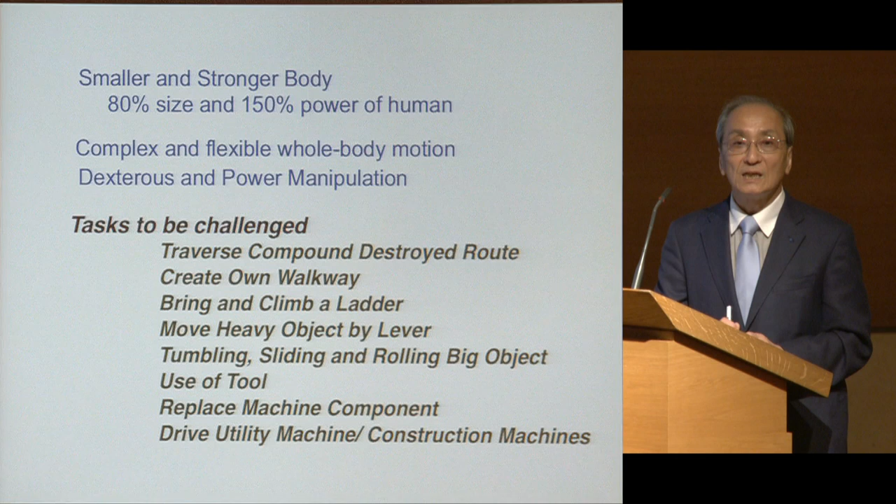I think DARPA's robotics challenge is very important, not only for military use, but I think it is a benchmark of the robot system. And also, I suppose it gives some paradigm change for the development of humanoid, because that clearly addresses important actual issues for required operations. Thank you very much indeed.